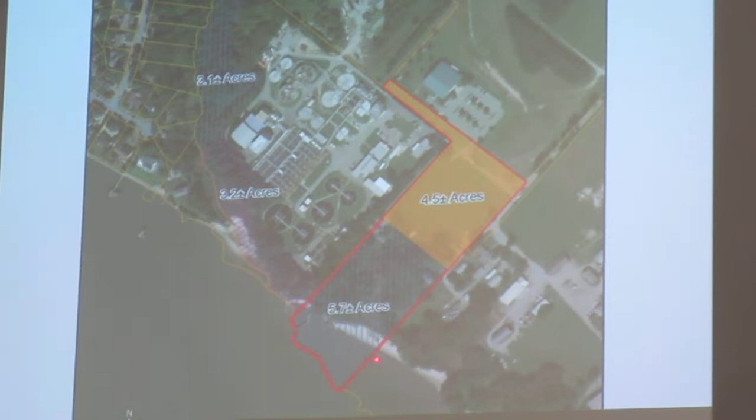Our thought process has been, we've identified this area, about 4.5 acres right outside of our gate. This is the road coming in, the road into the gymnastics facility and the HRSD. About 4 acres would be developed in that area. We're proposing to buy a little over 10 acres from the city and dedicate this part back as a conservation easement, and then we've got conservation easement that surrounds the plant itself.

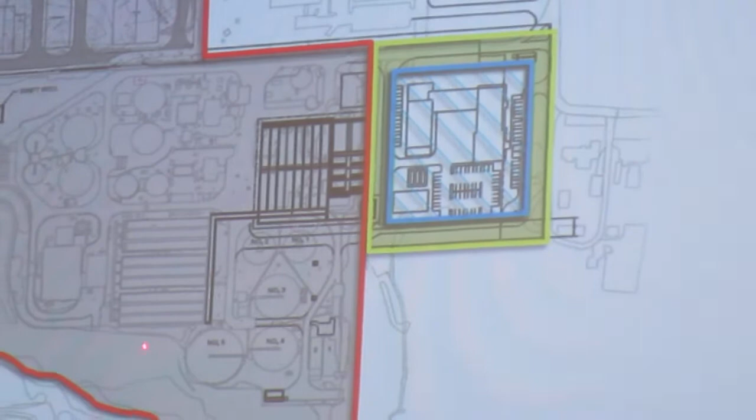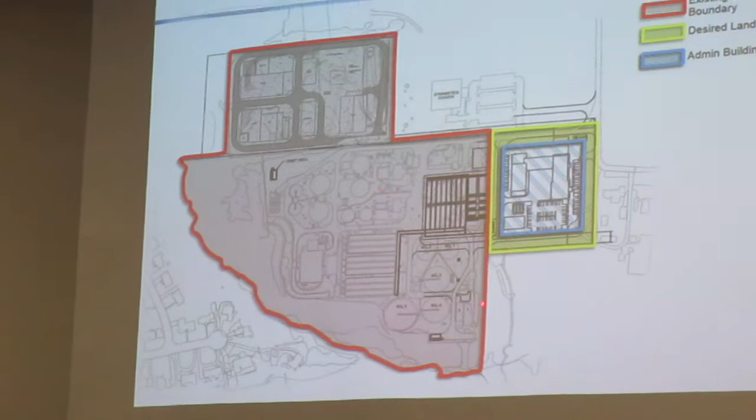Let me show you what would go into that little area. As I pointed out on the earlier map, we would take the administrative facilities that are in this area and relocate those out here to free up room for these tanks, and that's what's shown there. You can see we're pretty full of SWIFT facilities back here in this diagram.

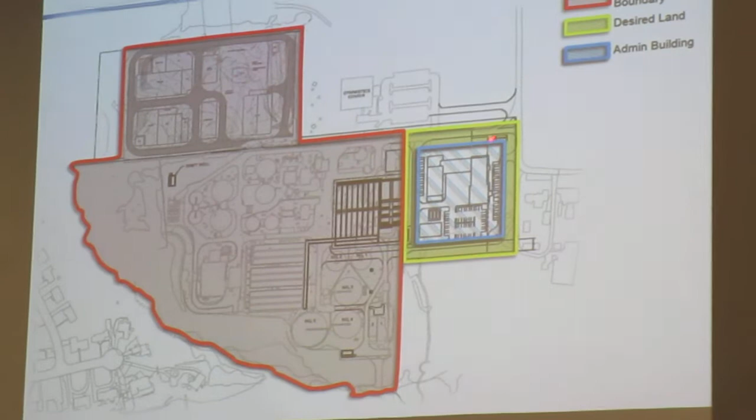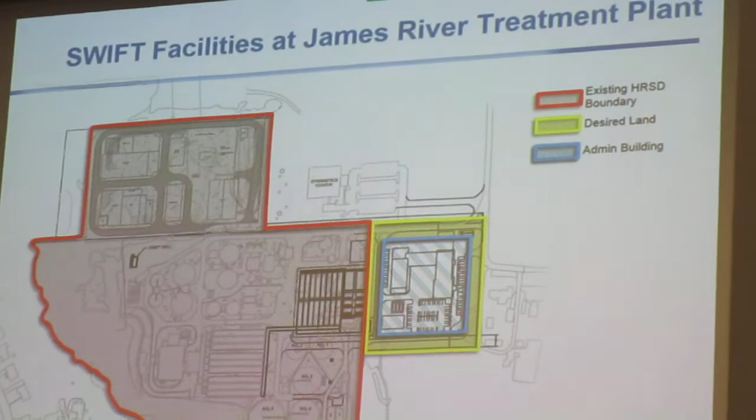The idea would be an administrative building at the front door, potentially with some shared conference space for community meeting space, and some exterior bathrooms that could support the recreation facility use of the trail. You've got access down here to the water right now, and then long-term, some additional benefits.

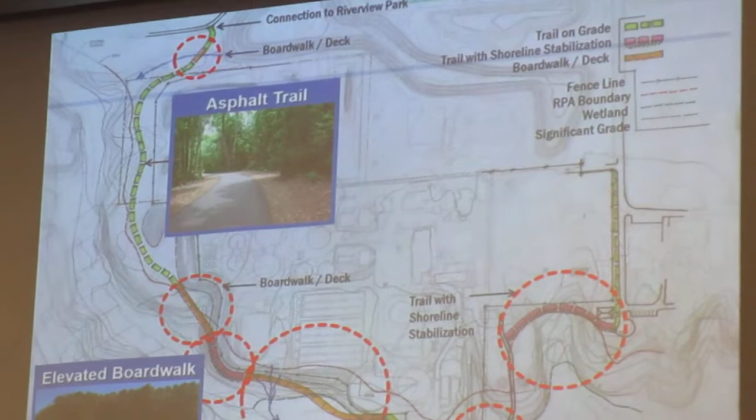So in exchange for that land, which is obviously valuable to the city and your residents, we would propose building a trail around our facility that would end near that admin building over here, and essentially hug our fence line. So it's not river access, but it's river view.

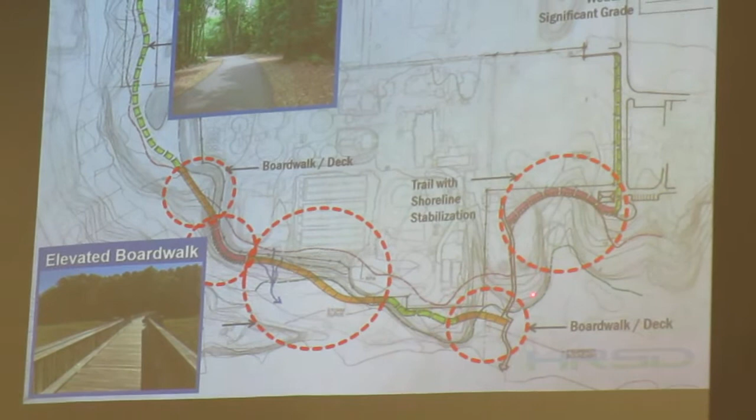You'd have a paved section, some elevated sections, and we'd be fixing the shoreline through here, but it would provide really pretty vistas of the James River all the way around the plant, and then come back up and tie back into your trails that exist in the park.

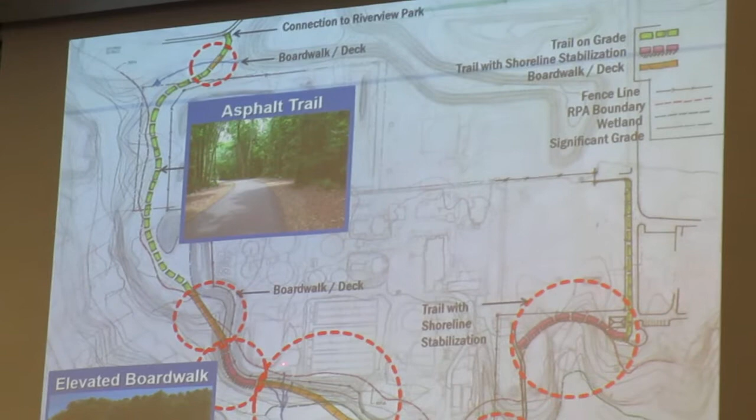So it starts, this is the berm, and it would start back here on the existing trail and tie in, come all the way around our treatment plant and back up. So the concept is, in exchange for that property, we would provide additional public access to the James River view shed there near your plant.

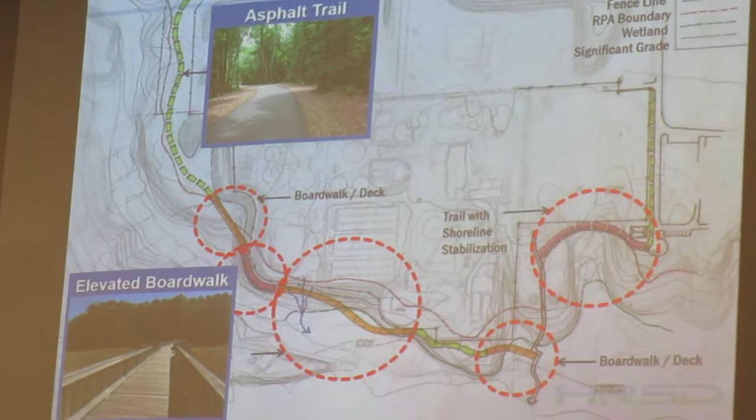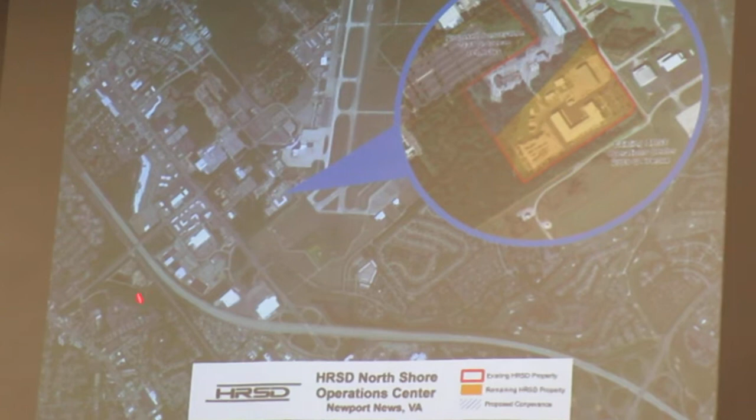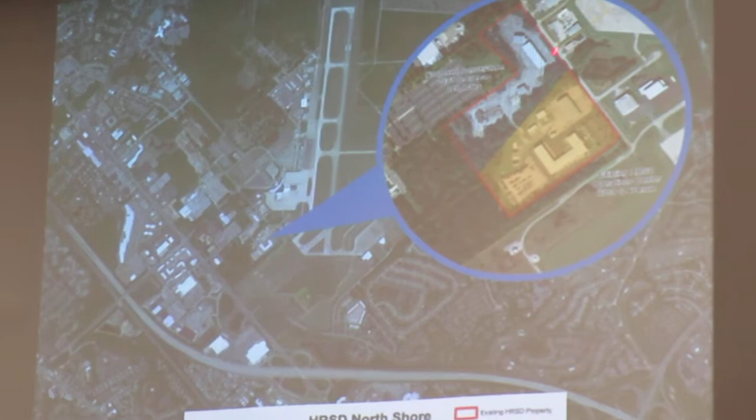The other thing we're proposing is we own this piece of property next to our facility on G Avenue. There's the airport, there's 64, Jefferson Avenue, Bland. We own 2 pieces of property, well, it's all 1 piece of property at the moment. Our former maintenance shops were here on this 10-acre parcel, and we moved to this one in 2014. When we did that, we met with the city manager at the time and gave Newport News the first right of refusal should we ever sell this.

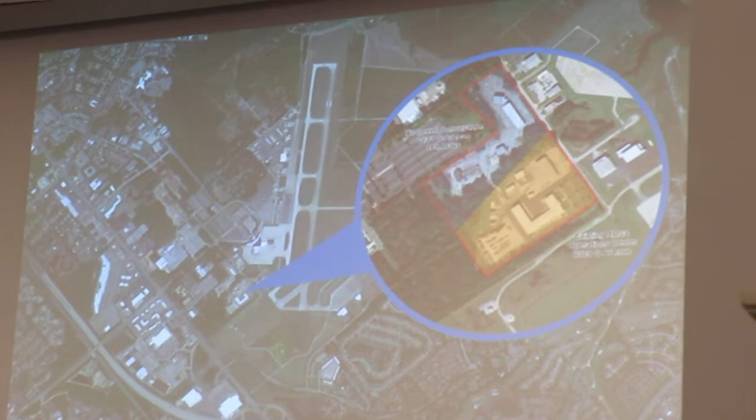If we are able to make this exchange work for the property next to our treatment plant, we would give you this piece of 10 acres with the improvements that are on it. Granted, the improvements are not great, that's why we moved, so it's not the best deal in the world. It is a piece of property, you control it, but in full disclosure, it's not the best building. So that would be part of the deal as well, and then finally, a cash payment.

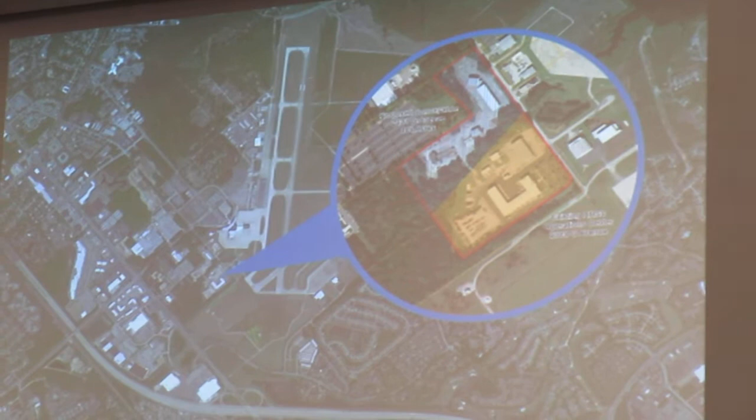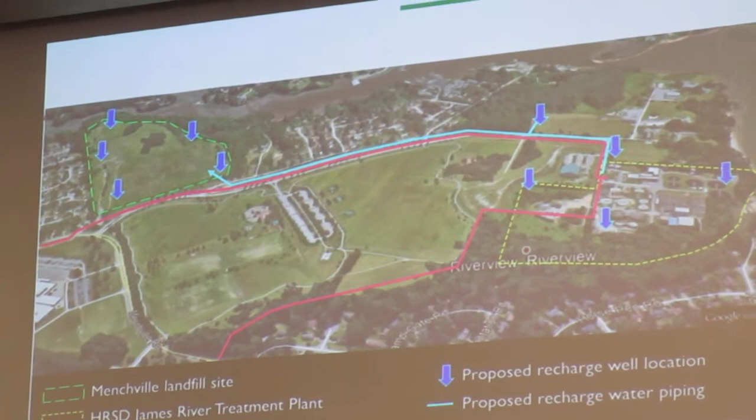Whether we build on our existing footprint or get the additional land, we would really like to make this work. We also need some well locations off of our site. To make this work, when you're recharging the aquifer, you can't do it all in one spot. So the wells have to be about 1,000 feet apart, and each well would put about 2 million gallons of water into the ground a day. To make that happen, we need facilities that are spread out a little bit.

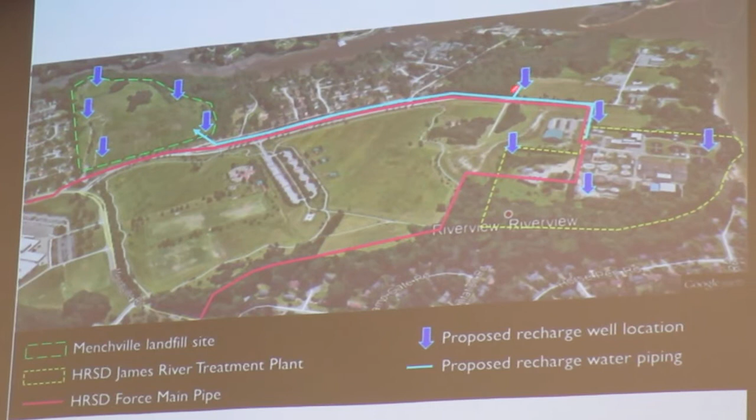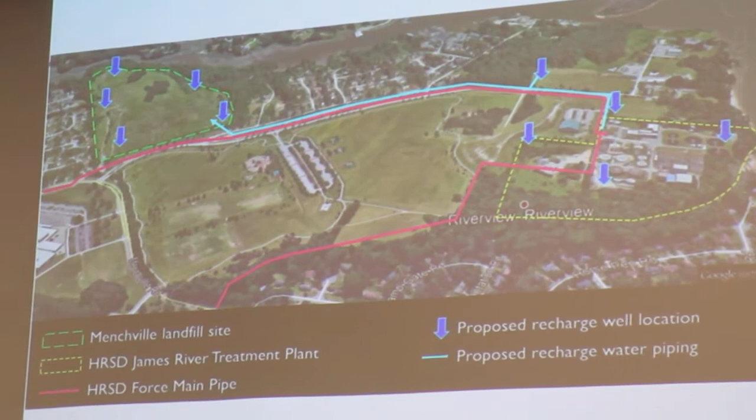The ones we're showing on this map are on property we would still own, that's all part of the existing site. This is next to the existing cell tower, and I'll show you that. These 5 are located on the former landfill, on the edges of the landfill, where it's really pretty out of sight and not conflicting with any existing uses. Essentially, we take our fully treated water, the drinking water quality water, and it would be piped to each of these well locations, with a return pipe for when we're back flushing those wells, which happens daily.

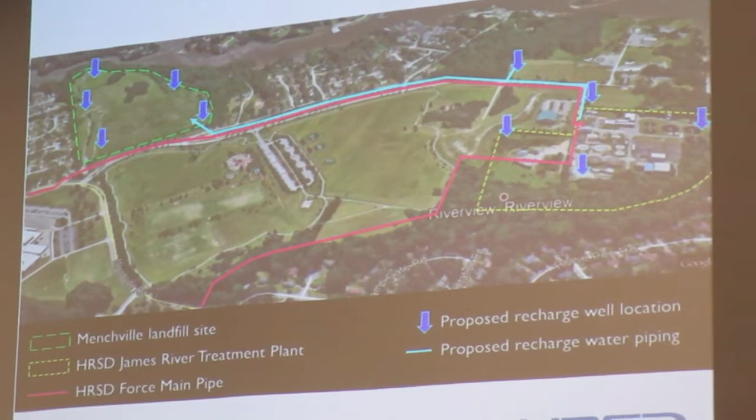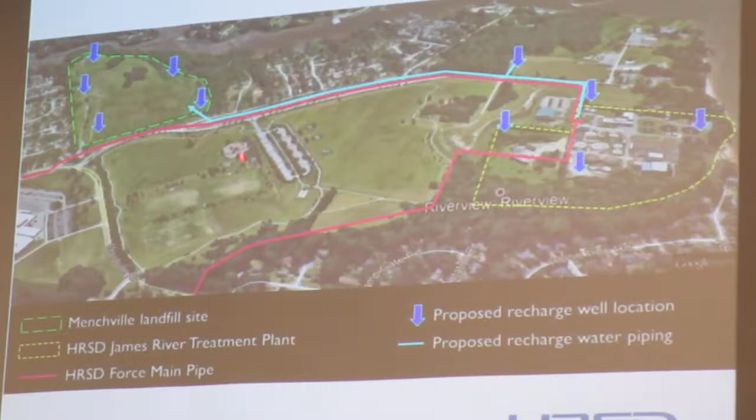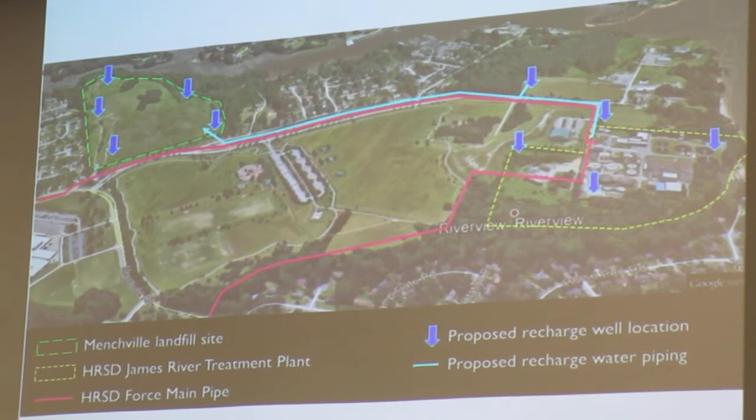Those we only need easements for, 40-year easements, and we would be willing to negotiate whether that's paid for up front in a lump sum or over the course of the 40-year easements.

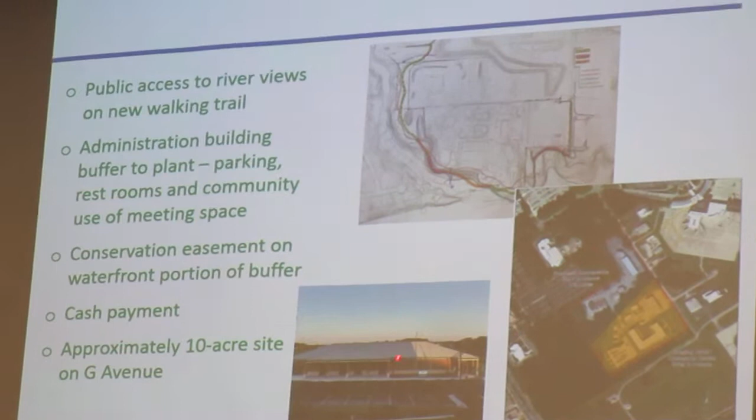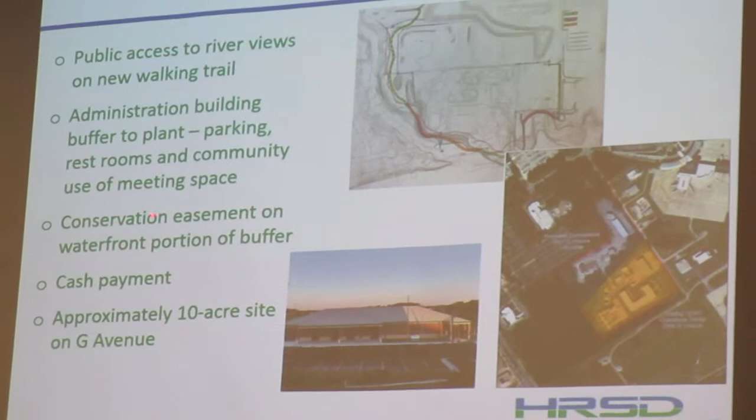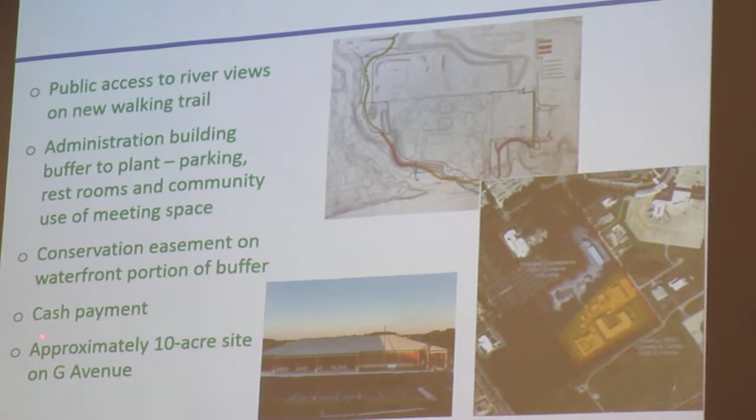So really the direct benefits—there's a lot of indirect benefits to the city and to the region from SWIFT—but the direct benefits would be this walking trail with public access that doesn't exist today. An administration building that we build close to the plant, but it would have parking, restrooms, and shared community use space available. A conservation easement on that front portion of the property towards the water, making sure no one else uses it. We really like to have that buffer controlled next to our plant. A cash payment, and then that 10-acre site on G Avenue.

Our current schedule moving forward, while it seems like we've got a lot of time left, we're actually pushing hard to get to the 2032 finish. So the idea is we're going to do 5 full-scale facilities between now and 2032. And to make all that happen, there's a sequence, obviously, and we're really looking to try to get some terms and conditions for this agreement in the early next year, January timeframe.

We'd love to hold a public meeting out at Menchville High School or someplace close by to get the public's reaction to this concept. We didn't want to do that and get out in front of you. And so that's why we're here today, to 1, make sure that you're okay with us doing that, and 2, to give you this layout of how this moves forward from that point.

So if we get that done and we bring you back a proposal with terms and agreement, we'll have some idea what the public thinks. We look for a public hearing at some point in February, I hope, in an ideal world, and a conveyance of the land with the exchange of everything we just talked about—which is, again, public access trail, facility on G Avenue, and cash payment.

And I want to stress, in addition to the public hearing on the land disposition, they would also want a conditional use permit for the rest of the proposal that they're doing. So there would be that public process, which you could either tie together, but there are two pieces of that for a public process.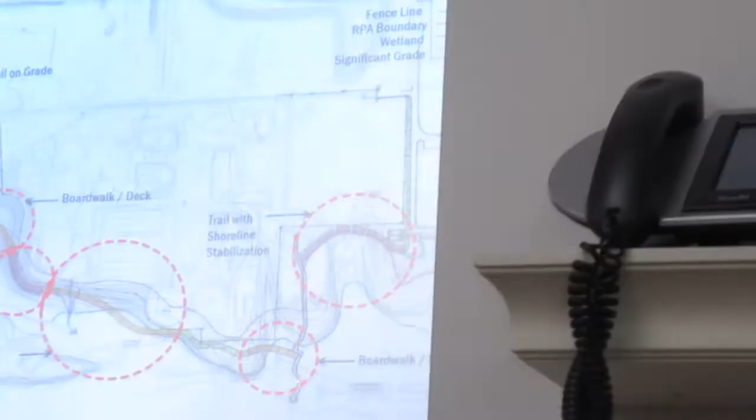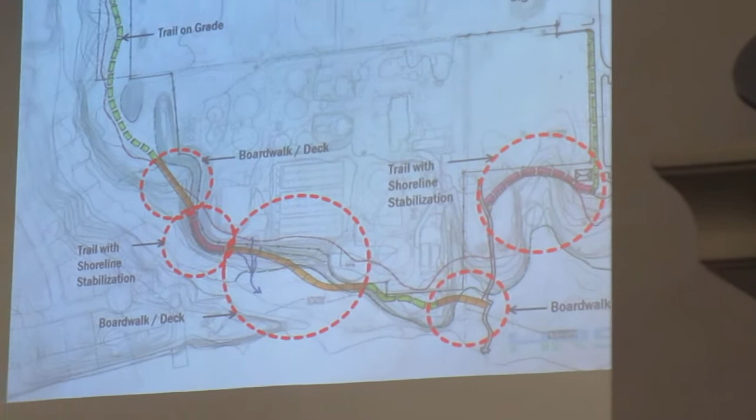With the conservation easement, what would happen to the visitor center and the boardwalk that's out there right now? So the way we originally looked at the trail was potentially tying into that, leaving the boardwalk in place and tying into it. We might look at rebuilding it. I know it's got some conditional challenges. The idea was the existing trail and boardwalk would be tied into by this one, but it may require some reconstruction and an additional piece to tie back in at that side. We would work around the visitor center if that's what the city wanted. We're more than willing to work with the city on any combination of rebuilding that, doing something different with it, or incorporating it with our building. That's sort of up in the air at this point, based on input we get from you, from staff, and from the public.

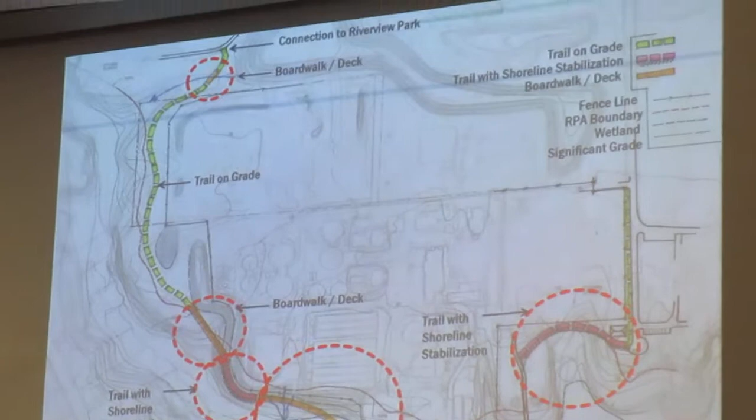As you mentioned, we've been out there, I've walked it with Michael and gone through it at the center. It isn't in the best condition, so if there was some possibility to work with them on what happens there in the future, we would certainly be open to doing that.

Not of the trail, but the maintenance of the shoreline, that would all be on HRSD going forward, all the maintenance. The repairs that need to be done now would all be handled by HRSD, including that section that would be in the conservation.

What is the footage on that? It's about 20 by 40 feet. So it's a small house. Yeah, it's basically a pump station. Yes, all it has in it is the piping for the well and a back flush pump that's used to move the water back out of the well, because it has to continually clean the screens by back flushing them on a daily basis. From our conversation, I don't think they would have any problem with it.

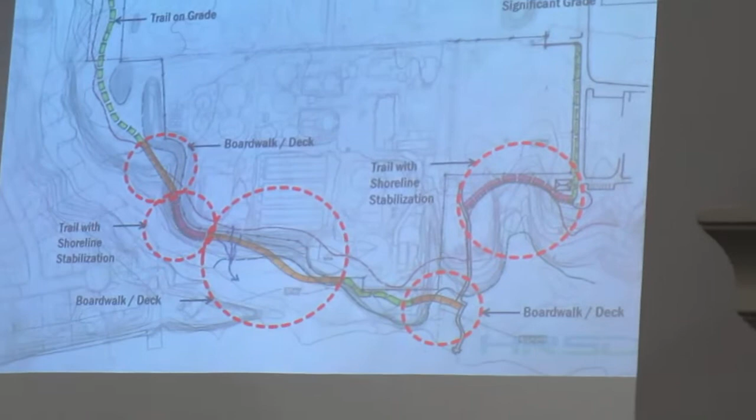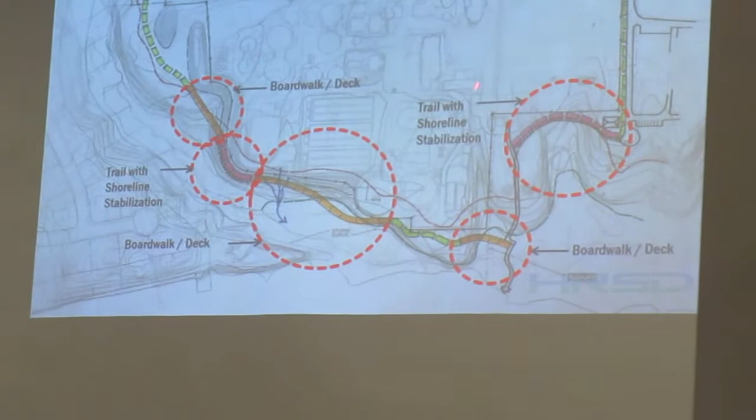What about the dog park? We need an easement to get a pipe under it, so we'd have to relocate it temporarily during construction, then put it back and fix it up to make the dogs happier. We actually had to do that in Virginia Beach, relocating a dog park there. Their Parks and Rec folks say more people bring dogs to parks than kids in Virginia Beach — they care about the dogs more than kids. Don't quote him on that. So we'll be very careful with the dog park.

Yes ma'am, I just wanted to know, in reference to the boardwalk piece — you said that'll be no river usage, but river view? Correct. So would that be like in this picture, just able to walk, no seating or anything? I think the idea would be there would be some places with seating and overlook.

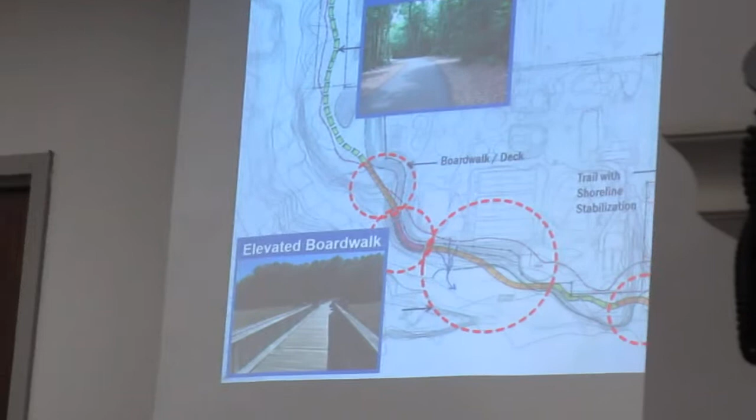So there's sections that are going to have to be elevated walkway, and sections that will be paved on the ground, supporting the structure on the side where the slope goes down. For the most part, we'd work with a citizen group and Parks and Rec to design that with facilities people would like, making sure there are places to sit and enjoy the view. The concept is view only, since it doesn't allow you to get down to the water.

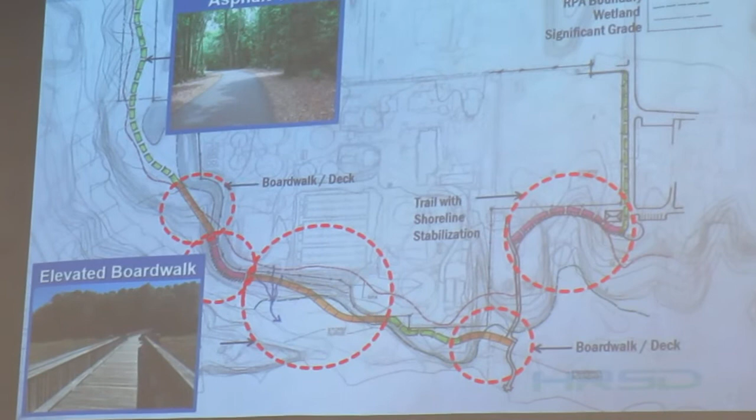Exactly, okay — it's elevated around there, following our fence line. I don't want to get too far ahead, but some conversations at the staff level suggest there may be an opportunity here too. If you recall, the Menchville Marina is very adjacent, off site, so we're having conversations about how to support or build on what they're proposing and make that connection to the marina where there's water access.

And if you recall, a few months ago you were leasing it to a new proprietor, and they're making some improvements. So we have some opportunities there to possibly partner on this and make something really nice for the community.

We're not in the trail operating business, so the concept here would be to dedicate that easement back as a recreation easement to the city and Parks and Rec. I think Michael is good with that, and we'd build it to their standards to make that work.

You mentioned a community committee, and I really like that idea. One time we did have one, an advisory committee for the farm, did we not? Yes ma'am — going back, which raises the question we've talked about internally: what are the next steps for the rest of the property? Because obviously the question is what happens next.

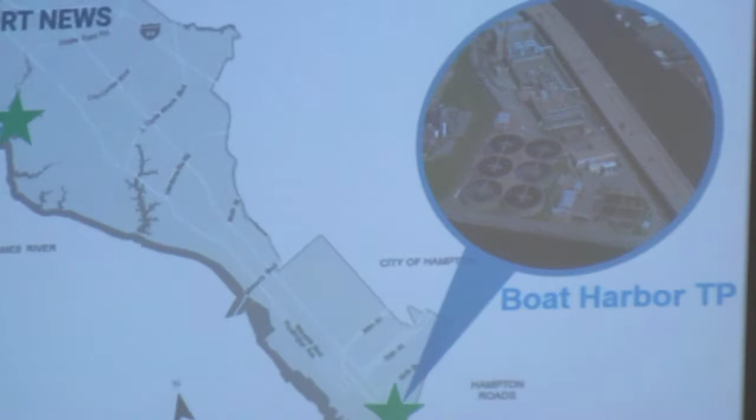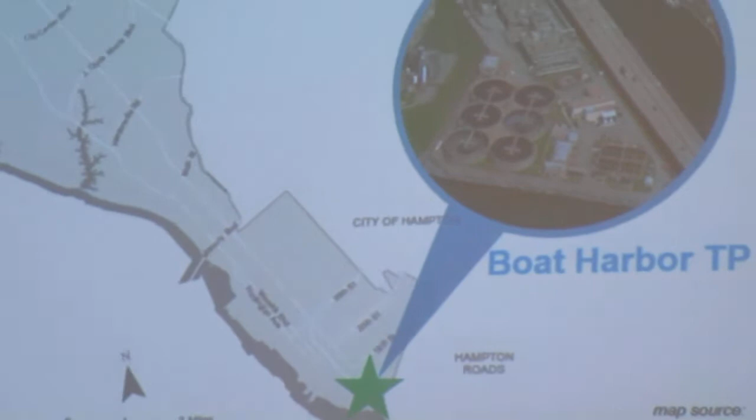What will be required at that point is some pump station facility. We're looking at whether that's on this site or on some adjacent land nearby, because it's so tight here it's really hard to build a pump station and keep it operating while we're building it. So we're in the early exploring stages of what we need to do there.

But ultimately that becomes pretty much vacant land that we'd be looking to the city to do something with. I don't know what, it doesn't have a lot of great uses right now. It's kind of wedged in between industrial uses, the oil tanks are over here, and there are some other industrial uses, and then of course the small boat harbor is right there with the fishing uses. So it's a little hard to envision yet how that can have a real positive use, but I think with some creativity there's something there.

Question too, is there some discussion about the future expansion of the Monitor-Merrimac, and where that would go? VDOT has not talked to us about that.

Going back to the G Avenue property that they mentioned giving to the city, we've done some preliminary review. We've taken a number of staff through for potential uses. It's pretty much large open space in a good location. We've had police and fire through there, they have some large equipment they may be able to store there. We may be able to store some Parks and Rec type facilities and save some money by using that. There may be some other uses. We have not come up with anything definitive for council to pursue.

We would obviously come back to you with our recommendations, since it would need some improvements, but some of the things we might propose might not be that critical. You would have control of 10 acres right there near the airport, not too far from other property where the Industrial Development Authority operates in that general area. We've been going out there reviewing it, I personally toured it, and staff has gone out several times since then to look at what might be possible should council want to pursue it.